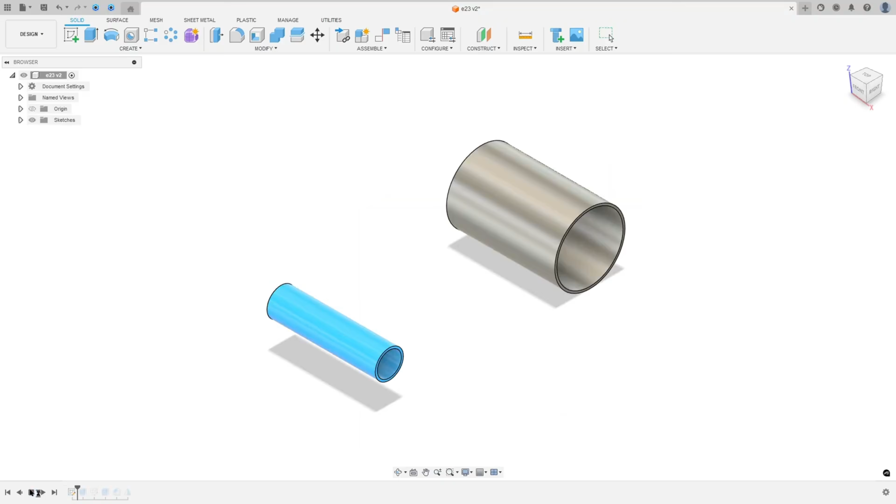The first step to create this part, we will create these two pipes here, in the right plane, this one and this one. We need to create a circle with 33 millimeters of diameter and another one with 35 millimeters of diameter. And on this side, a circle with 14 millimeters of diameter and 12 millimeters of diameter. The distance between these two circles is 100 millimeters, and the midpoint will be here.

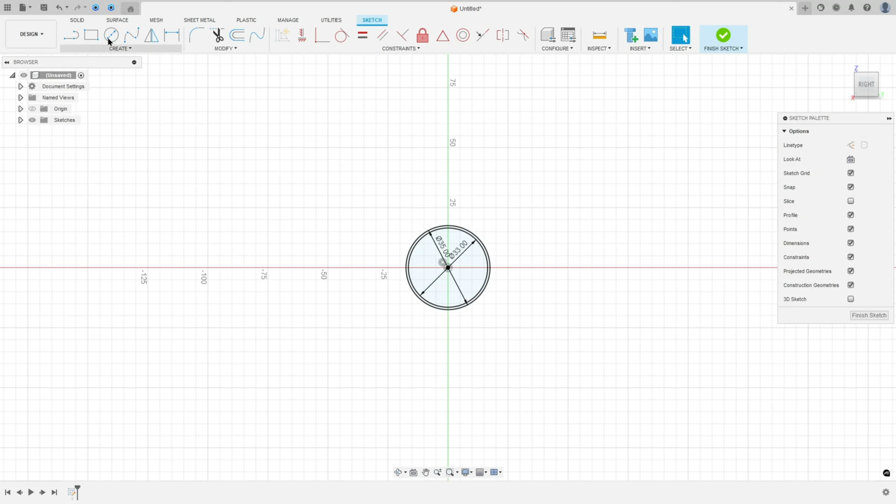So open Fusion, go to create a sketch, select the right plane, select the circle, click here in this point, make a circle here with 33 millimeters and another circle with 35 millimeters. Make a circle here with 14 millimeters and another one with 12 millimeters. Go to sketch dimension, the distance between these circles is 100 millimeters. Go to constraint, select horizontal vertical, select this point here and the midpoint.

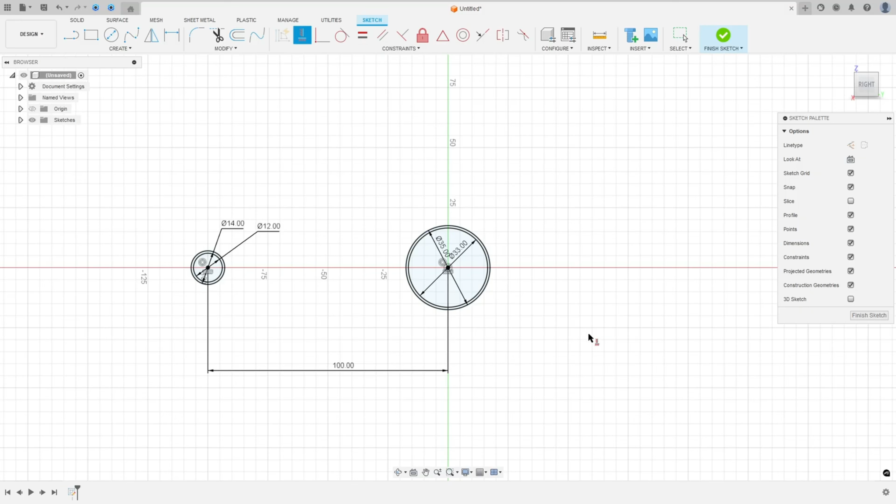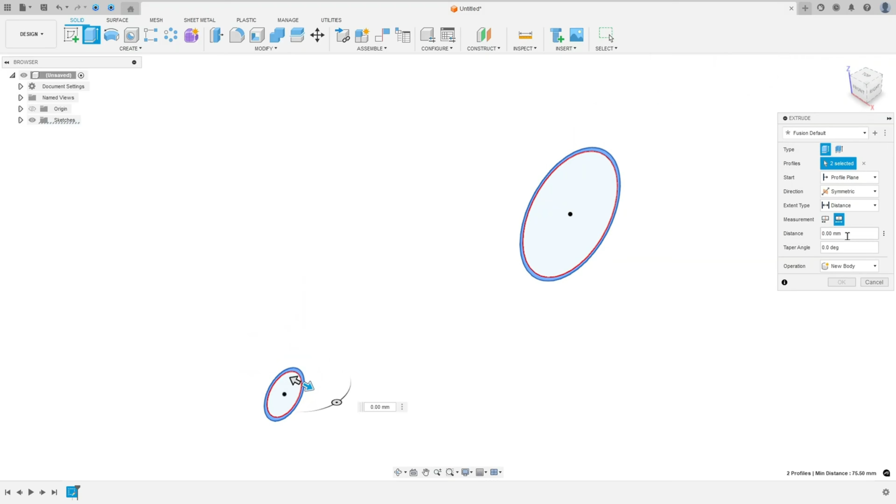Finish the sketch. We need to extrude this 54 millimeters of length. Go to extrude, select this profile here and this one. For the direction, select symmetric, measurement whole length, and the distance here 54 millimeters. Operation new body, press OK. We made this.

Now we will create this body here, this part. To create this, we'll select the right plane and make this sketch here. We'll create a line here, another line here, and another arc. These lines must be tangent with the arcs. The arc has 27.5 millimeters of radius, and on this side, 15 millimeters of radius. This arc is concentric with the circle, and this arc here is concentric with this circle.

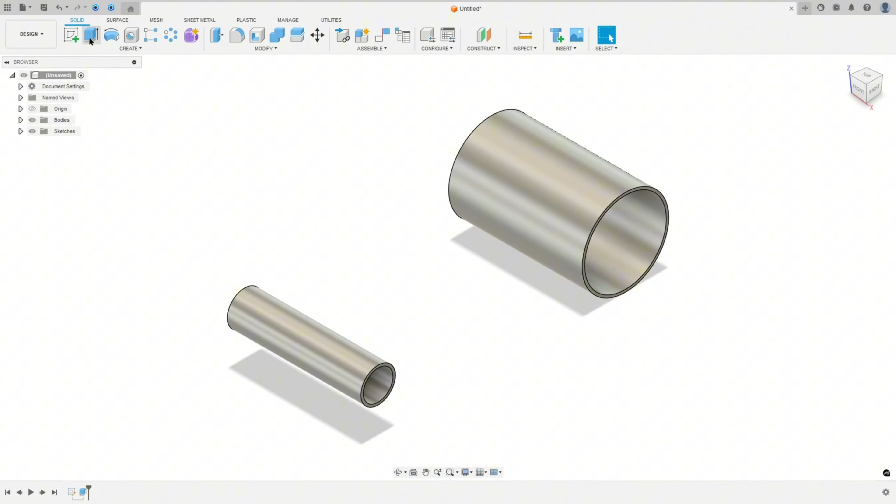So go to create a sketch, select the right plane, go to create, select project, include project, the selection filter, select the bodies, select this body here and this one, press OK. You can hide this body here.

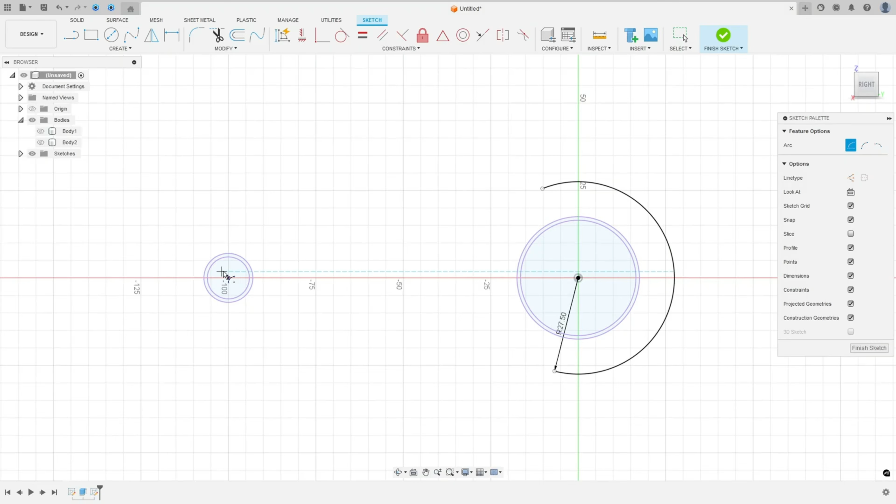Now go to create and select the arc, center point arc, click here in this point, make an arc here with 27.5 millimeters. And make another arc here with 15 millimeters of radius.

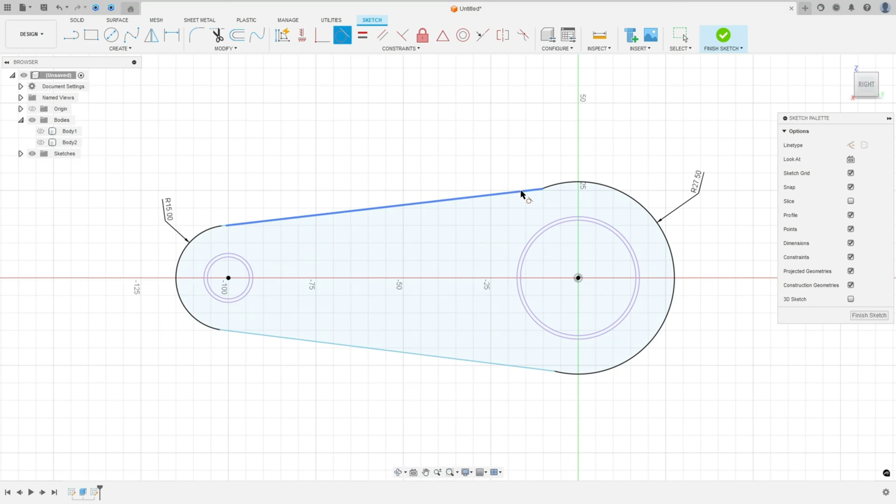We made this. Now select a line, make a line between these 2 points, and make a line between these 2 points here. Go to constraint, select tangent, make this line tangent with this arc, and make this line tangent with this arc. Let me erase, I made the 2 lines here, sorry. Make this tangent here, and tangent here. Okay, we made this.

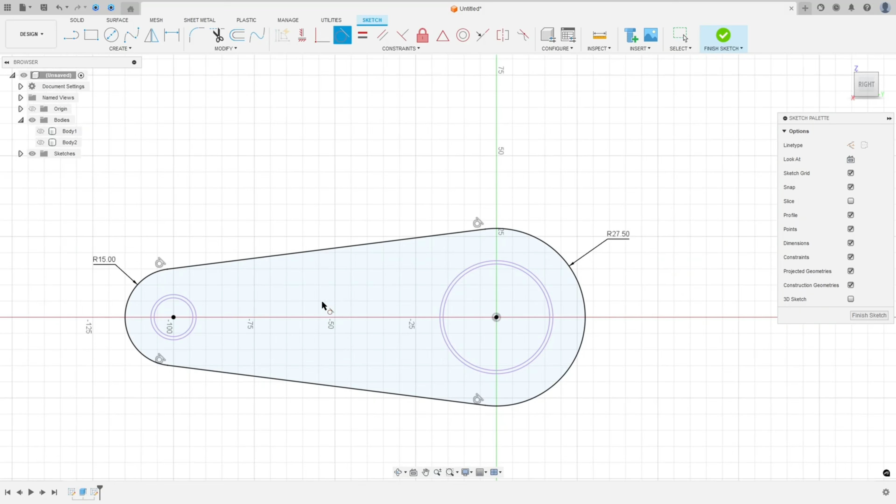Now finish the sketch. Show body 1 and body 2. We need to extrude this 10 millimeters of distance.

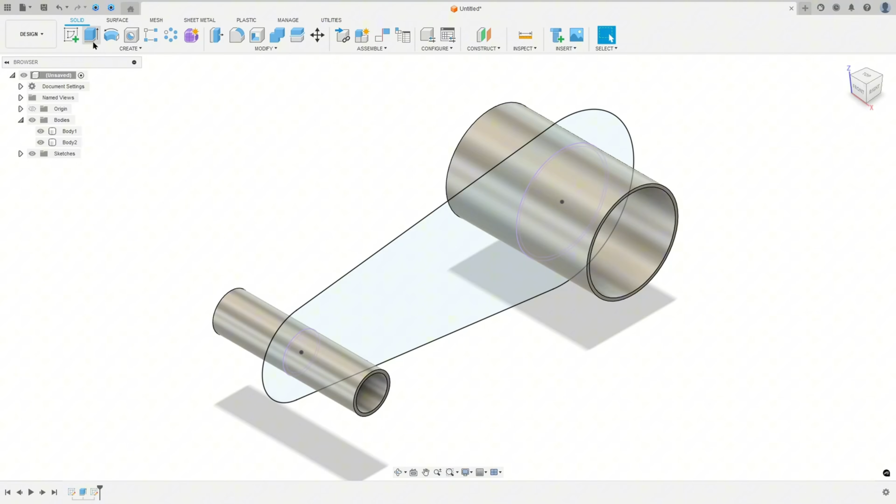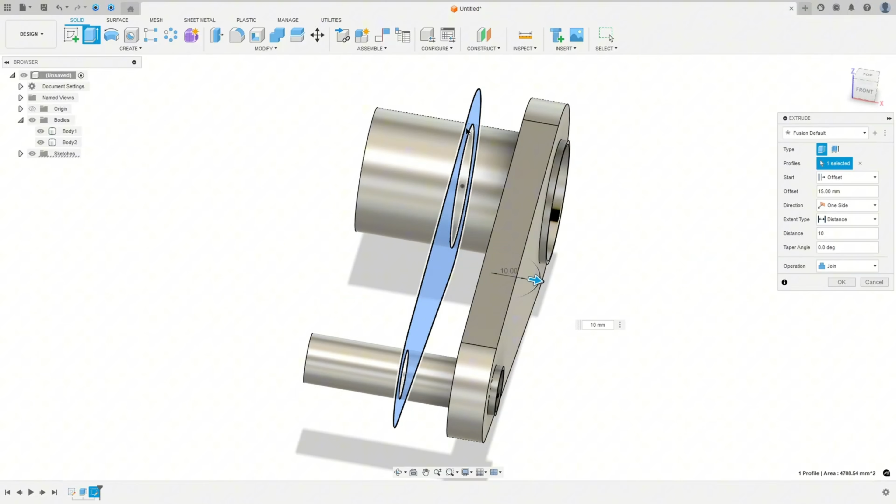And here is the plane, so we'll need to make an offset, with 15 millimeters of distance, and extrude 10 millimeters. Let's make this. Go to extrude, select this profile. The start here, select the offset and the distance 15 millimeters. The distance of extrusion here is 10 millimeters. Look at this, we have 15 millimeters here, the offset, and 10 millimeters here. Operation join and press OK.

Now we'll make this chamfer here with 1 millimeter. Go to modify, select the chamfer, select this edge here, 1 millimeter and press OK.

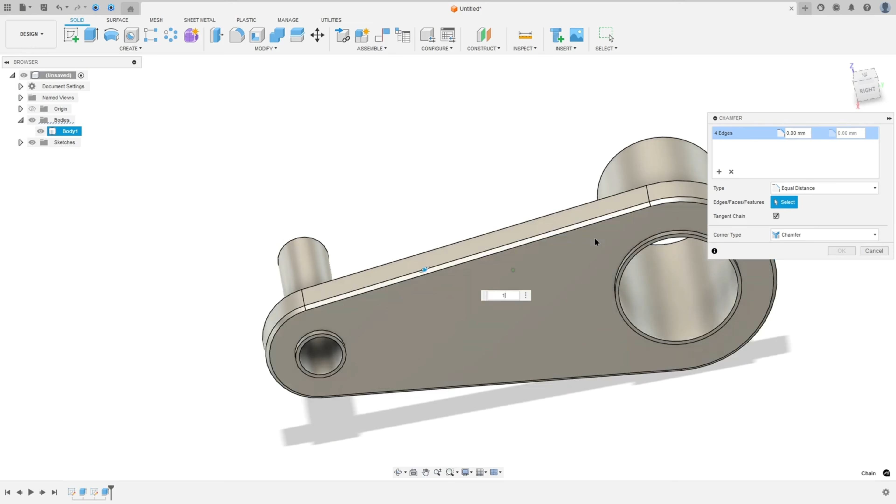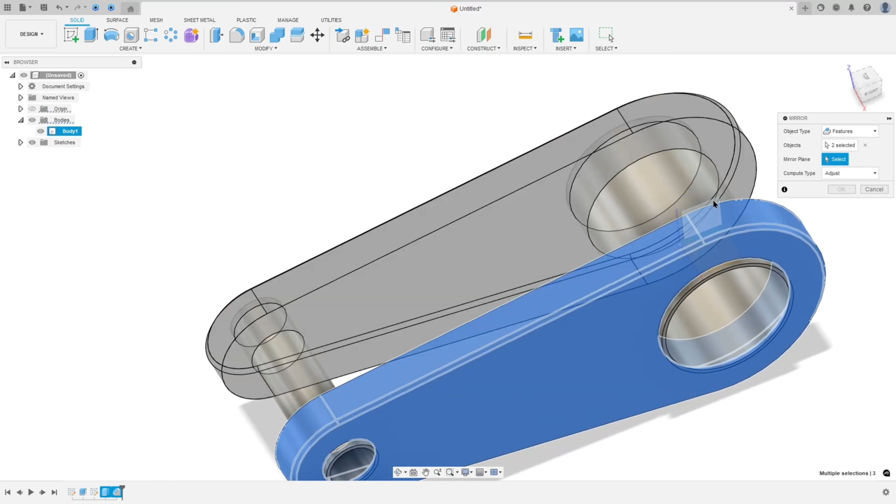We made this. Now to make the same body here on the other side, we'll go to create and select the mirror. The object type, select features. The object, select the extrusion here and the chamfer. And the mirror plane, select the right plane. Press OK, we made it here.

Now press letter A on the keyboard to add color here.